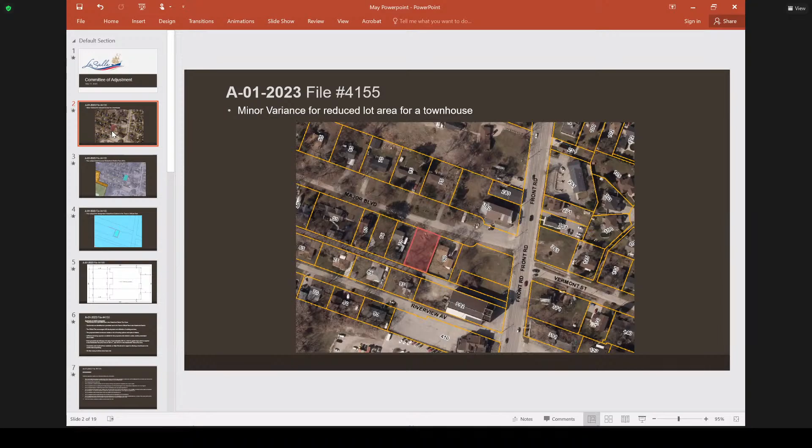Therefore, with 3 units, the applicant would require to have 900 square meters. The application before you this evening is to permit a townhome with 3 units with 880 square meters. Mathematically, that's a difference of 20 square meters, or on a per unit basis of approximately 7 square meters.

In our official plan, which was adopted by Council on October 18th, 2018, the property was designated waterfront district, and that document implements and actually was before its time in its insight into the movement of the province to allow for what's referred to as gentle intensification and the allowances for additional multiple dwellings to be created within neighborhoods.

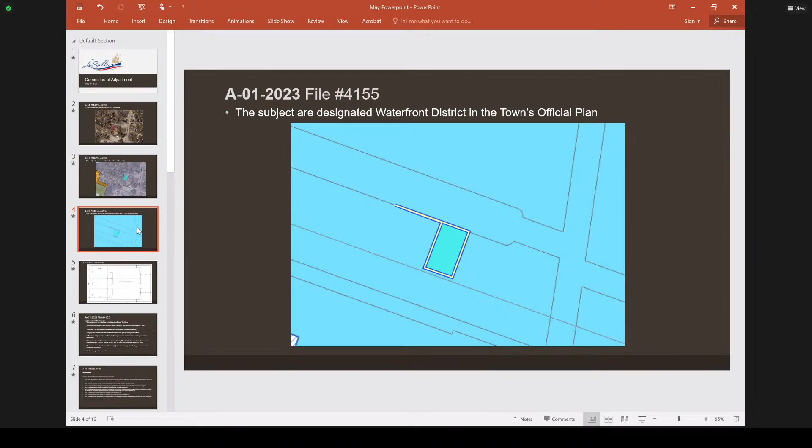The sketch before you illustrates a concept of the dwelling which is being proposed to be constructed. It illustrates basically a 3-unit dwelling, complying with the zoning regulations with regards to the size of the units, the width of the units, the side yard restrictions, the rear yard restrictions, as well as the front yard restrictions. These units have a garage within each and allow for a parking space in front, therefore complying completely with the zoning bylaw, with the exception of the minimum lot area.

And in addition to the comment that I made earlier, with a lot of this width and of this depth, it would be, had this lot been approximately 2 feet wider, a minor variance would not have been required, and this application would have gone directly to a building permit.

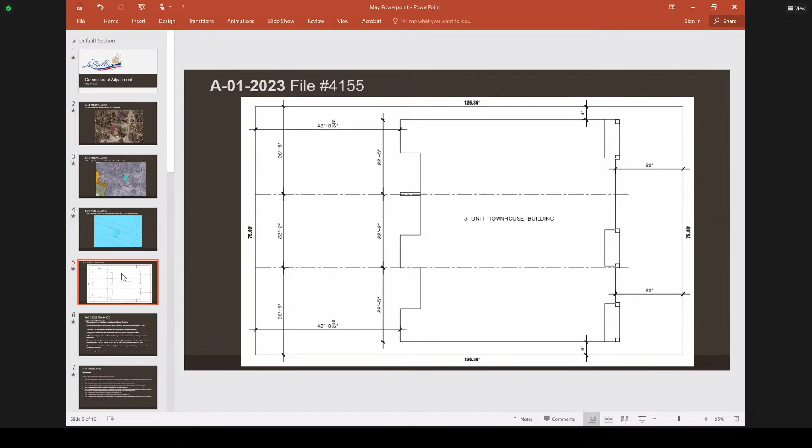In summary, the application, as we've said, is a townhouse, which is a permitted use within the waterfront district zone. It should be noted that the zone no longer permits the construction of a single detached dwelling, nor does it allow the construction of a semi-detached dwelling. This zoning will only permit the construction of townhomes, apartments, mixed-use buildings, offices, and commercial type redevelopments.

The official plan encourages the infilling and utilization of existing services. The proposed townhome creates a mixture of housing options, which is encouraged within the official plan and by the province. In discussions with our engineering department, staff have confirmed there's sufficient servicing capacity to allow for the 3 units to be constructed at this location.

That includes all services, including water, sanitary, and storm. Each of the proposed units will have an approximate area of about 293 square meters, which is only slightly less than what's currently required.

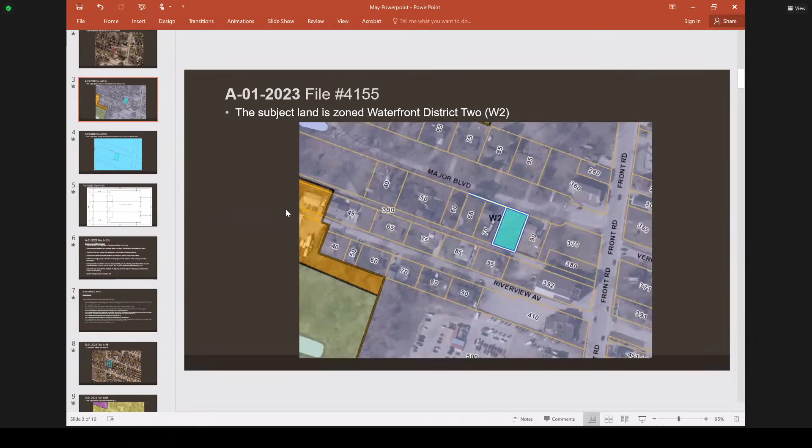Sir Michael Hebert, owner agent, here and present. You may now speak to the matter. Please introduce yourself with a brief explanation of your application, and confirm you have read and understood the staff report. Hi, Michael Hebert. Yeah, I confirm I've read the report. Just working with the planning department here to conform to, like Alan mentioned, the W2 zoning of this property.

Is there anybody present or online that would like to speak to the application? I live directly across the street. Please come forward and state your name and address. Marlene Bertelli, my address is 95 Major. Thank you.

The reason I'm against it is I live directly across the street. I know there's supposed to be ample parking for this building going up, and that's fine, but if they have company, there is no place to park. We have a small street, which means they will park on my grass. And it's not only that, we have a quiet street, a beautiful street, and it's going to change. There's going to be more traffic because there will be 3 different families living in that building. I am against it.

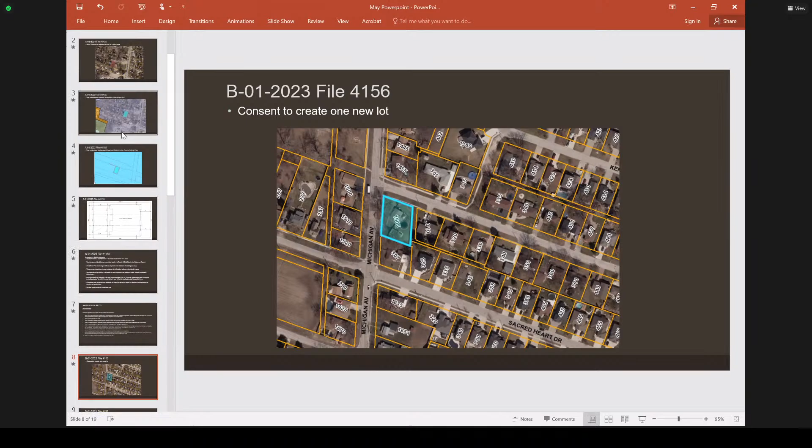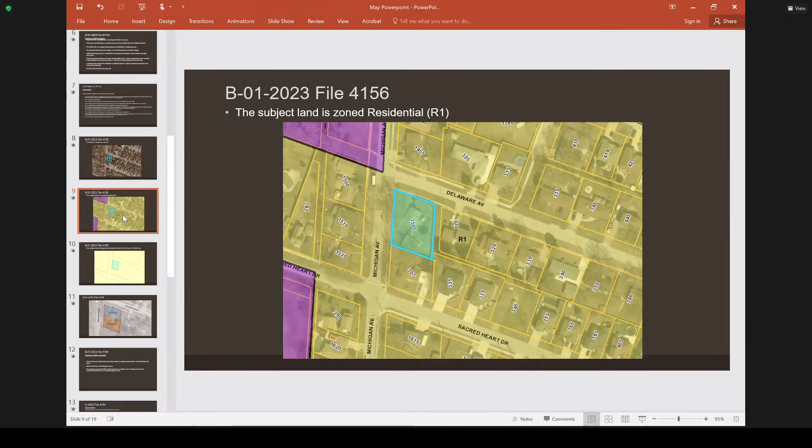The subject lands, zoned in our adopted zoning bylaw, are zoned R1. In the residential zone, both single and semi-detached dwellings are permitted as of right, along with apartments in houses. The official plan designates this property as residential, and that document was approved and adopted in October 2018.

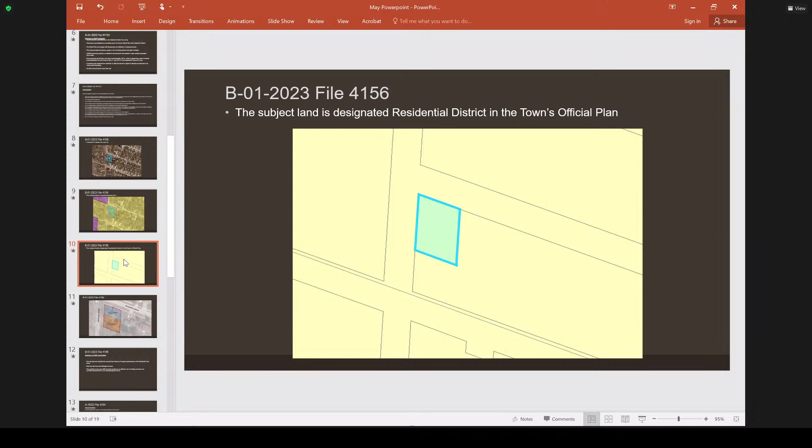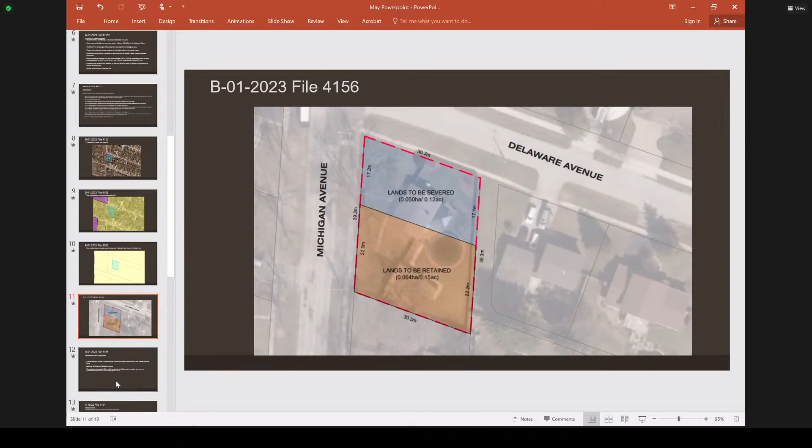The sketch before you illustrates the proposed severances, preparing this property for two lots. The first lot has 17 meters of frontage by a depth of 30 meters. The second lot has 22 meters of frontage with a depth of 30 meters as well. Both lots are in accordance with Bylaw 8600, allowing these lots to be created. Both the severed and retained lands exceed the minimum lot requirements for frontage as well as lot area.

Both these lots will front onto Michigan Avenue. As I've mentioned in our previous report, the ideals of infilling and the utilization of existing services continue here, allowing the removal of one home and the allowance for two homes to be built in its place. I'm available for any questions. Thank you.

Yes, would you come up to the chair if you have a question? The lady, please state your name and address.

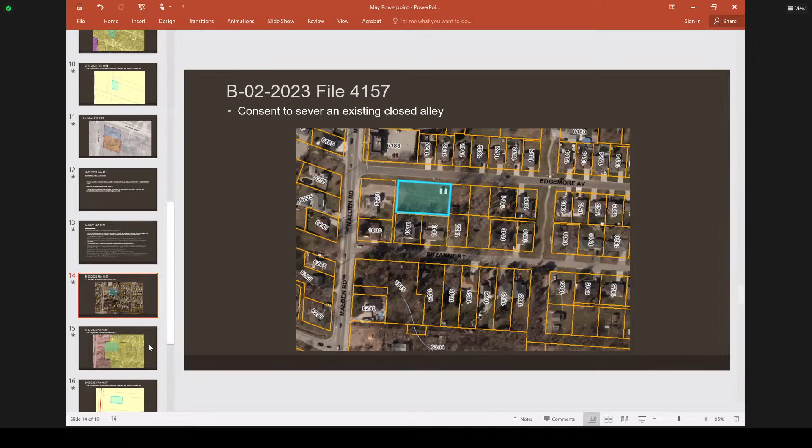The property, in bylaw 8600, is zoned Residential 1. The land is designated Residential District in our official plan and is fully compliant with the provisions of the official plan.

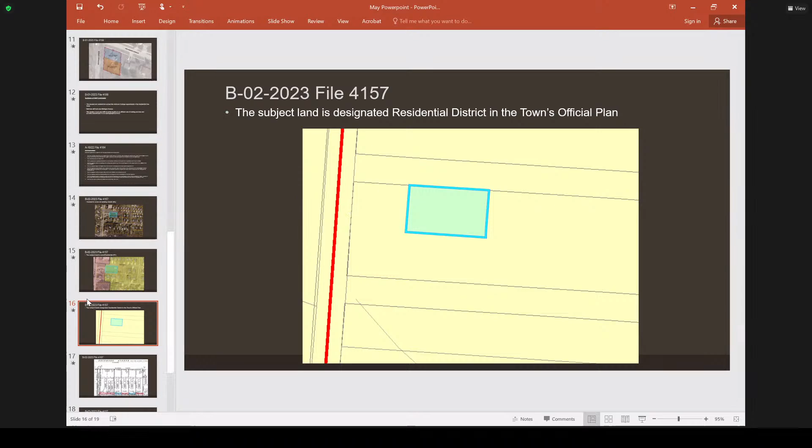What is happening this evening is when this alley was originally closed, it was closed as one block of land. The purpose of this evening is just to divide the individual parts, shown in red and blue, with regards to the future semi-detached units which are going to be built here. This owner chose to come forward and set out all of the lot lines for each of his units, and the timing in which the alley was closed versus when the plans were brought forward conflicted. So that's the reason why we're here tonight, just to sever this alley and allow those pieces to merge with those lots.

Once these mergers are complete, these proposed lots for these semi-detached units will be in full compliance with the zoning bylaw and meet or exceed the regulations thereof. I'm available for any questions.

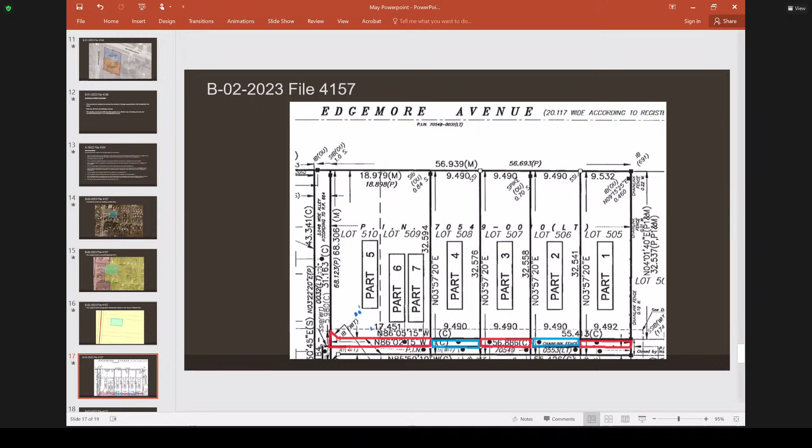There are 3 conditions which are part of our package this evening: the 12R plan, which we already have and will confirm there's no further need for changes; an undertaking from the solicitor to confirm that those lot additions will happen, occur properly, and be registered; and that all conditions are fulfilled by May 17th, 2025. Again, I'm available for any questions.

We'll hold off on the questions, Mr. Burgess, until administration is finished. So what we'll do is have the agent for the applicant come forward, and then if there are any questions of myself and/or of the agent, you'll be able to bring them forward at that time.

Thank you, Mr. Burgess. John Tedesco, welcome. Agent, you may now speak to the matter. Please introduce yourself with a brief explanation of your application, and confirm you have read and understood the staff report. John Tedesco, 2135 Washington, representing LA Urban Square Limited. Basically just housekeeping - there is a fence all the way along which we had put up already. It's just lot additions and housekeeping, basically.